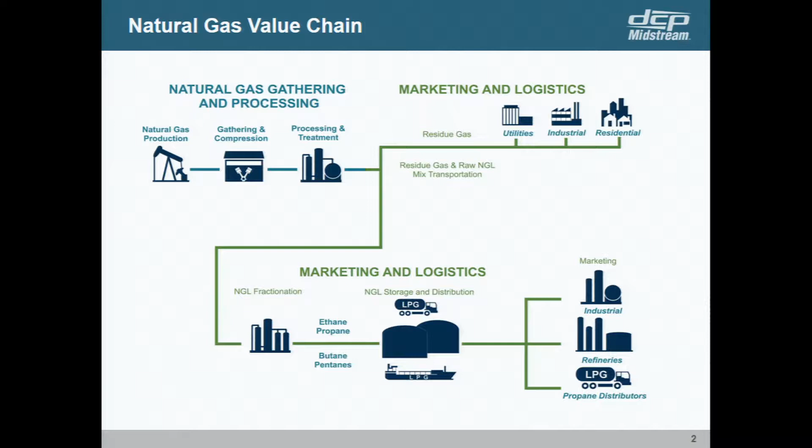As it gets downstream from the residue side, you can see where it goes to different utilities, industrials, or residential use. Or on the NGL side, it's coming down on the back side here, going to refineries and other products. Now, what I want to do is camp out on this one and re-hit this again. It was mentioned a little earlier today: what really is the value of natural gas? Because I don't think it's always really appreciated for what it is.

Most people, when you say natural gas, are going to say it's used to heat my home, or to cook or have a barbecue. And that's where it stops. Yet it does so much more than that. What you see here is that in the summertime, which we're all waiting for, by July and August we'll all be complaining about the heat and cranking our air conditioners, not only us but everybody else in the nation. And over 30% of the nation's electric power comes from natural gas.

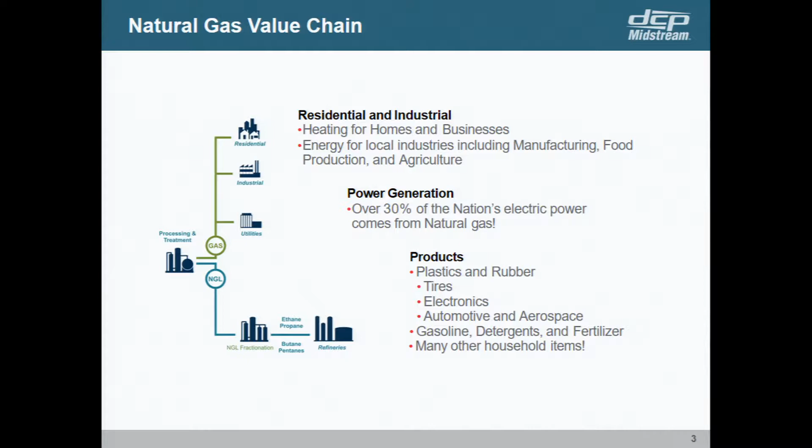As we get into the summer months, it actually increases even more than that. So there's a huge pull on that these days, and we see the market react to that. We used to have a lot of gas go into storage. You don't have a lot of gas going in there because of the heat. And when we have hotter summers, we don't always replace our storage as fast as we should.

The other thing I want to point out is natural gas is an ingredient used to make a lot of other things. It makes fertilizers, antifreeze, plastics, pharmaceuticals. People aren't aware it's in the medicines you may be taking right now as an ingredient. Electronics, rubber, and one of my favorites is fabrics. It's kind of amazing that we can take natural gas, process it and knock out the ethane, take it to the refiners, and scientists do all sorts of things, and it becomes polyethylene and then polyester.

And then you wear it. That always just blows my mind because people don't think about, if you're wearing anything poly, it's probably coming from the hydrocarbon molecule. And we just don't always realize that. So I'll say this here is that natural gas, as far as on the industrial side at the top, obviously it helps with a lot of other heating things around steel, glass, cement, bricks, other commodities.

I think the last thing to say on the commodity price is that I think we can all agree that natural gas is something that we use every day and we don't even realize it. And yet here we have a whole industry that most people don't even understand or recognize. And I go off that because as I'm out in public speaking venues or out in front of the public, there's just no information.

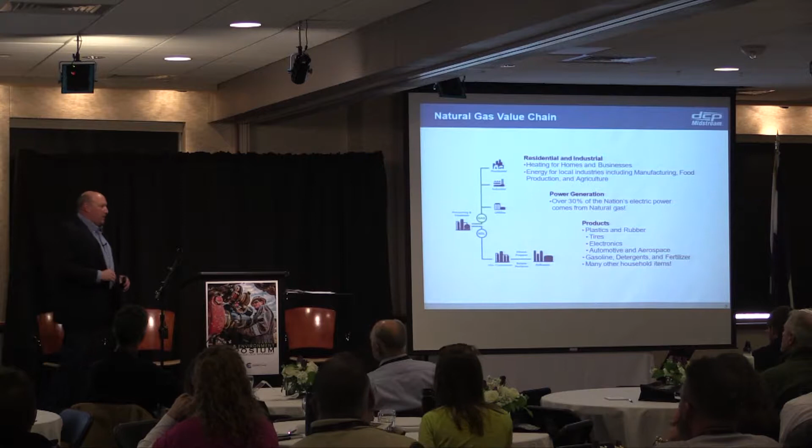They're like, what do you do? Again, they go back to like midstream must be something like what you see on TV, these big chemical refineries on the Gulf Coast or something, and it's nothing like that whatsoever.

I want to transition now and talk through a couple of things from a regulatory perspective, as far as who we are accountable to in the midstream. As we're out building facilities and talking to people, a lot of folks are like, who are you accountable to? Who regulates? What rules do you follow? And there's not a lot of knowledge on that.

And I'll just brag on my company, DCP Midstream. We were just awarded on Monday the first place prize for being the safest midstream company in North America. That's a tier 1 that has over 1 million work hours a year. So that was a big deal. Thank y'all.

I think sometimes the industry takes a bad rap on safety because they see one incident and then it gets blown out in the media a lot of times. But yet, you look at our industry, we're a very, very safe industry. Now that record is not zero where we want it to be and we're continuing to try, but we are a safe industry and we take that seriously.

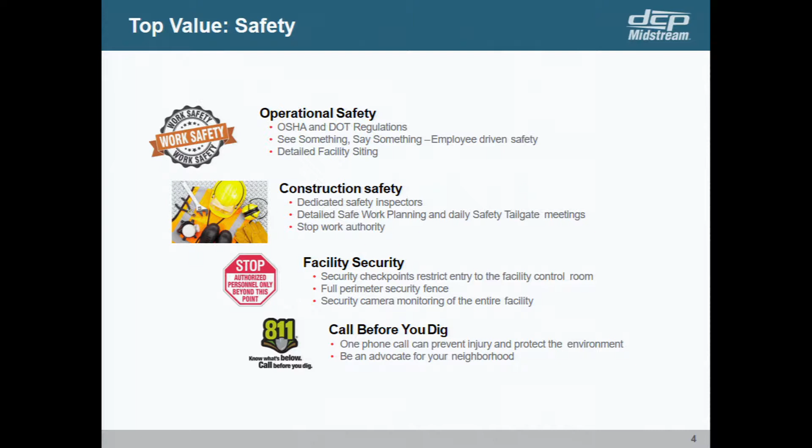I have been in the Weld County area now for 3 years. I've been out on site of at least 6 line strikes. And every time I go out there, they're like, I didn't know. I didn't know. And we're not talking about always hitting little bitty lines. Sometimes they're hitting big lines. And we've been fortunate it hasn't been more severe than what it was.

But 811 is a big thing where we try to get out there and educate the public, whether it's our neighbors, businesses, governments, anybody in the communities that we operate in. It is key to us that whether you're doing new road construction, road repairs, putting in utilities, new fiber optics, whatever it may be, neighbors putting in a new fence, adding on to homes, or farmers doing ditch work, new drainage work or irrigation work versus just the normal turning of the dirt.

They need to be calling 811 because when you think about Weld County alone, where we have over 4,000 miles just of DCP pipe, that's not even counting what other midstream companies have. That's a lot of pipe out there that you got to be sure you're looking out for as you're working. So we really make that a big deal because you don't want to strike something like that. This is obviously a new line lay, and we try to keep these on the perimeters, out of the public community and so forth.

But there's times where we come up next to roads and other things that you just got to be aware of. And sometimes contractors and the folks that do business are not always aware of that.

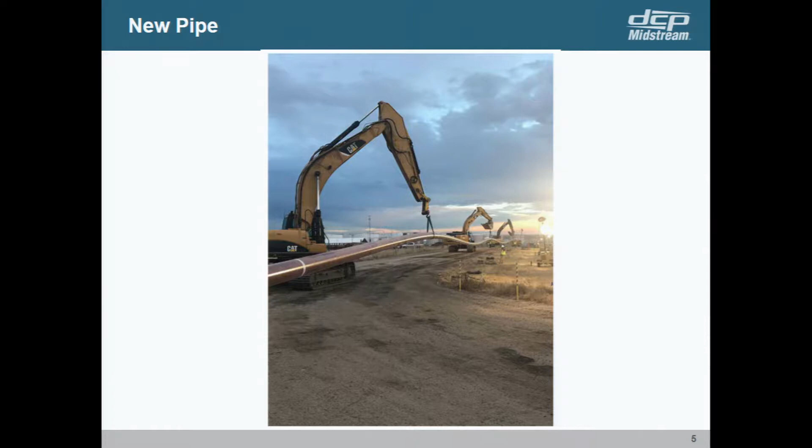Now I want to transition here and keep going: who else are we accountable to, from a rules and regulations perspective? And I'm going to stop right here. This is very important you hear this. This is not all the agencies that we report to. I got 3 slides. I just kept them because we all can associate with them here in the room.

But there are a lot of agencies that we are accountable to. Even on the 3 agencies I'm going to show here, this is not all their rules. I've just pulled some to get you a feel, an awareness, and a sampling of what's going on. Obviously, we start with the federal level EPA. You can see here that we have everything from air and water to what we do from a waste perspective as far as how we have to be in compliance.

I'm not going to go into these. I'm not going to bore you with that. First of all, my knowledge is not deep on that. And second of all, I got whole teams of people that know this much more than I do. But again, it's just for an awareness.

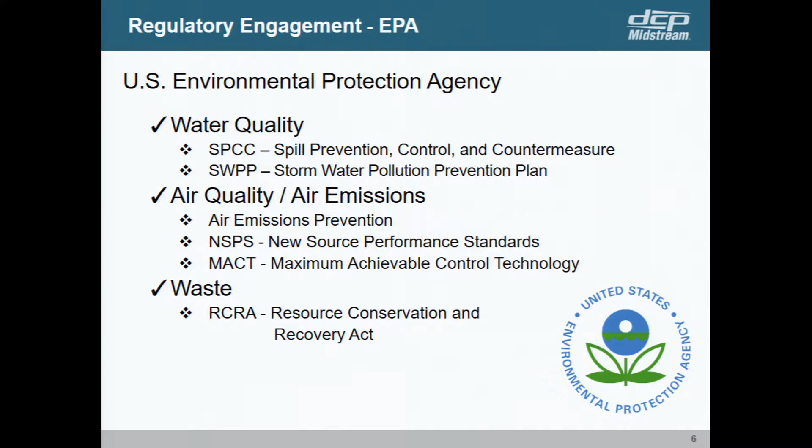You come closer to home, you got the CDPHE as far as what we have to do here. Again, looking at construction permits and operating permits. When we're building a new facility, we have to give a lot of information. We'll talk a little bit about that. We have to say, here's our plant design. Here's the equipment we're going to use. Here's the parameters for how we're going to operate that equipment. By the way, here's the emissions profile of that equipment. And they take all that into account as they're reviewing and looking to award us permits.

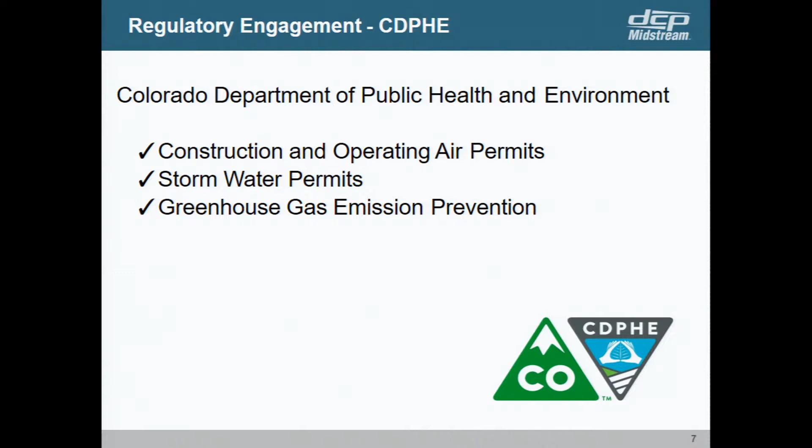Even above and beyond what we're doing from an environmental perspective, we have our own internal teams that help us to be sure that we're compliant. We do a lot of daily environmental monitoring and inspections. We have plant operators that are out taking instrument readings to be sure things are operating within the parameters as designed. We're taking automated information in as well, running it through calculations to be sure that we're in parameters. Go down to the bottom, we do a lot of self-internal audits.

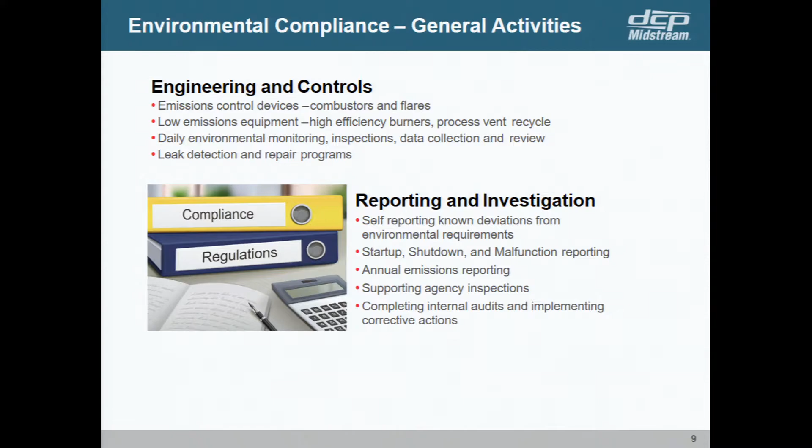When we do our self-audits and find things that are not correct or we're out of compliance, we actually have to self-report. And that's something that we have to do, and as a good operator, it's something that we do. And it can be painful sometimes, like, oops, we made a mistake, and yep, we got to turn ourselves in for that. In addition, the different agencies that hold our permits will come out and do planned and surprise unplanned visits to be sure that we are in compliance.

Going to go to this slide. I'm going to take a little bit of a turn here. I'm going to have to pick up the speed. So here we go. We're going to do 26 slides in 10 minutes.

What I want to do, we can do this, man, trust me. I got this. So here we go.

So I want to pause because this here, I want y'all to kind of think about this neighborhood engagement. As midstream, you think about the environment in Colorado, it has changed a lot in the last 3 years. It's not just where we can say we want to go build or drill or whatever, we get what we want. That is not the environment that we are in. And so we find ourselves out working with the community a lot more.

Before I get there though, there's many in this room, I saw the hands go up earlier, maybe 50% of this room right now is non-industry, which means you may be working with a midstream company that's coming and bringing you a submittal form for you to review. There's some first responders in this room. You may be reviewing an emergency response plan. You may be a commissioner who's reviewing a USR or a land use plan.

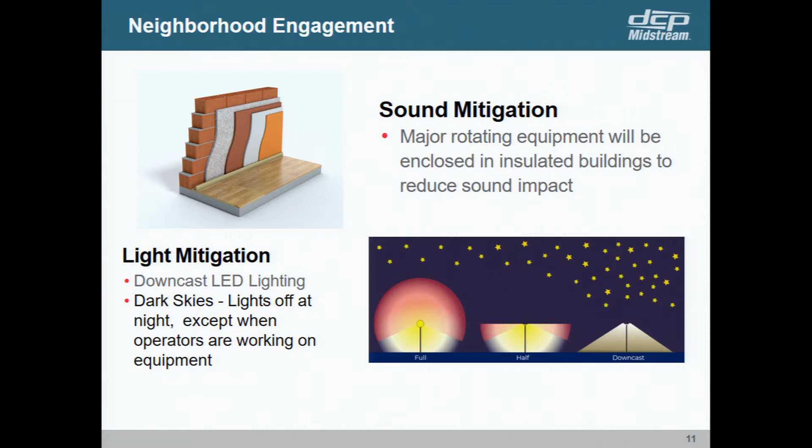If you were to drive by, you may not even know there's a plant there unless you see the light in the control room on. We will turn the lights on if we have to go out in the plant and do something, but outside that, we're operating dark skies.

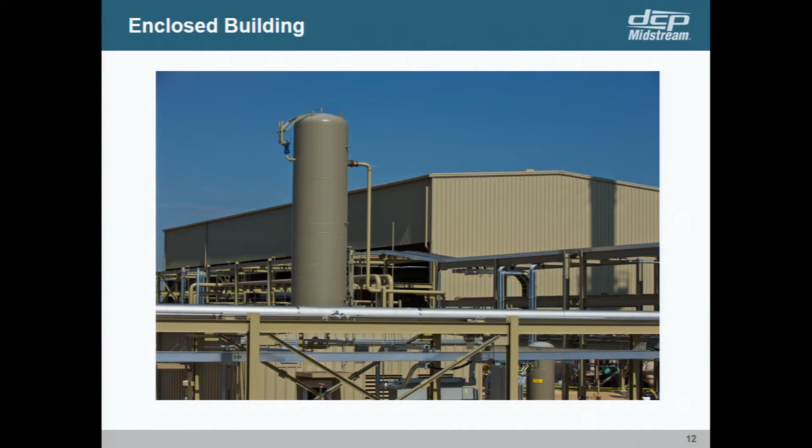Here's a sample, a picture of a building. You look on the outside, just like a normal tin building, but it's not. Inside, it's got a lot of special insulation that kind of dampens and captures the sound, keeps the sound down. That's where we have all of our engines and compressors, in that building right there.

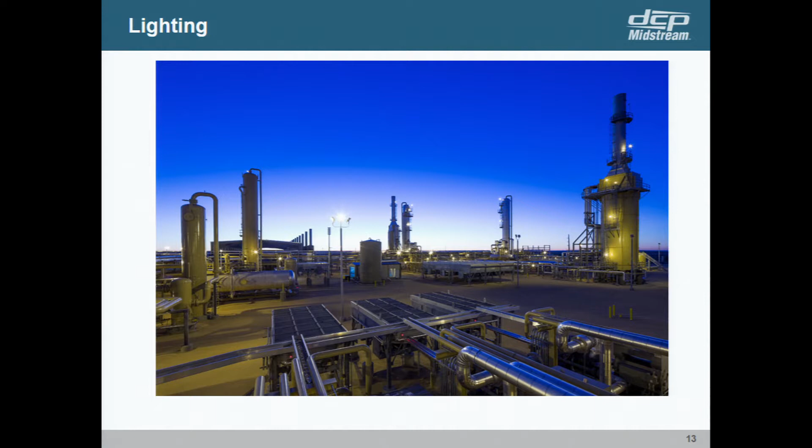So we're trying to address that. Here you can see where we have more of the broadcast lights, where you can see them hitting on the camera. Again, this is stuff that we're moving away from.

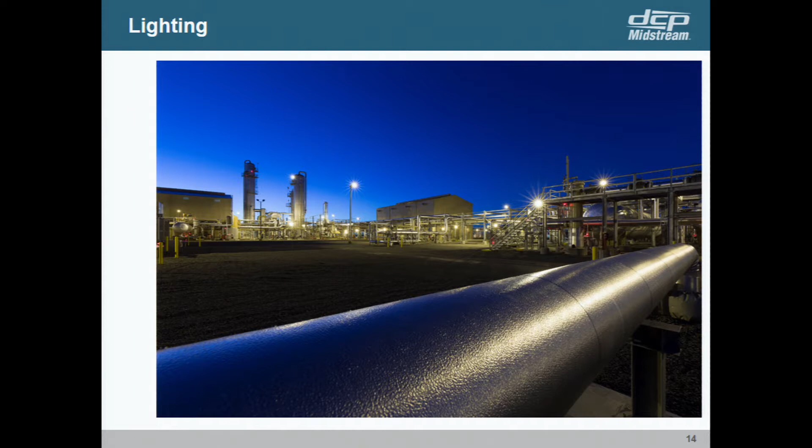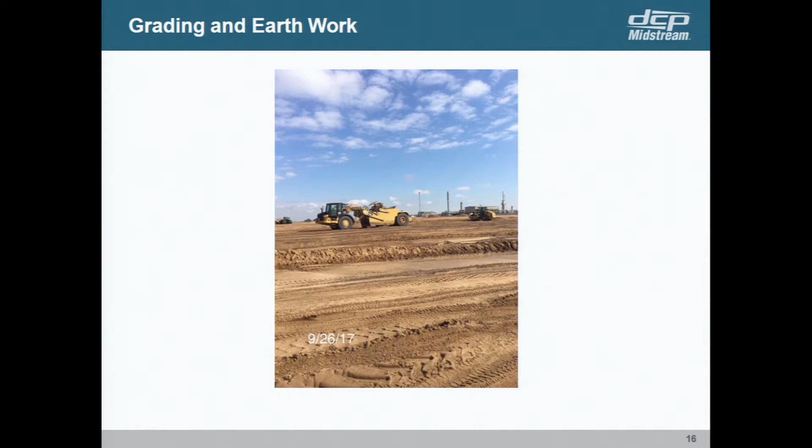So say we're in construction phase now. This is where we're going to blitz, so run with me here. We're going to go through this. You look at all the different phases that we have. Obviously, we're going to have grading. Grading can take anywhere between 4 to 8, 10 weeks, depending on how much grading we have to do, soil type, all that type of stuff.

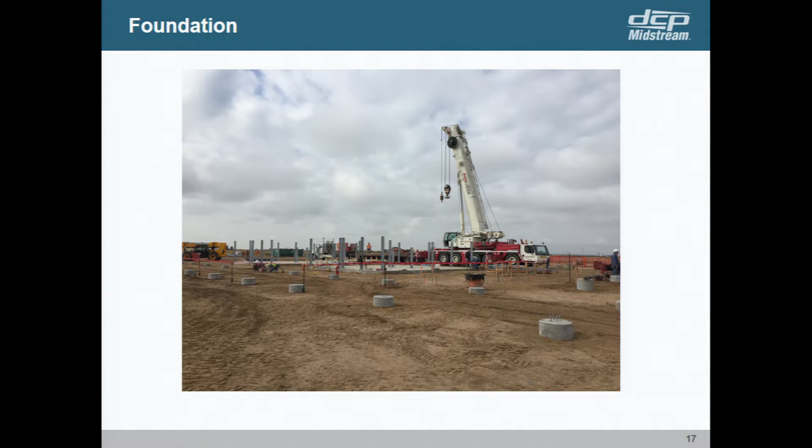Then you move into your foundations. Here you can see screw foundations, where we're going to be putting on pipe racks. You got slab foundations for big, heavy equipment that's going to be put in there. And so that's your next phase. Again, more foundation work from the screw piles. These actually are not cement, but more from a pipe.

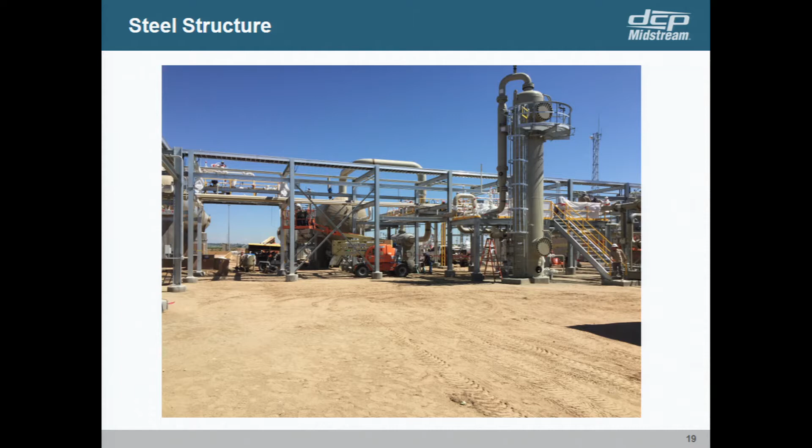Then you start erecting the pipe racks around there. You start laying your pipe in there. You start connecting the large vessels. You can see at the bottom end where the pipe racks are, and you got the screw piles that we added onto there. Continue to build on this. Again, more pipe rack shots. And then we get into this point here.

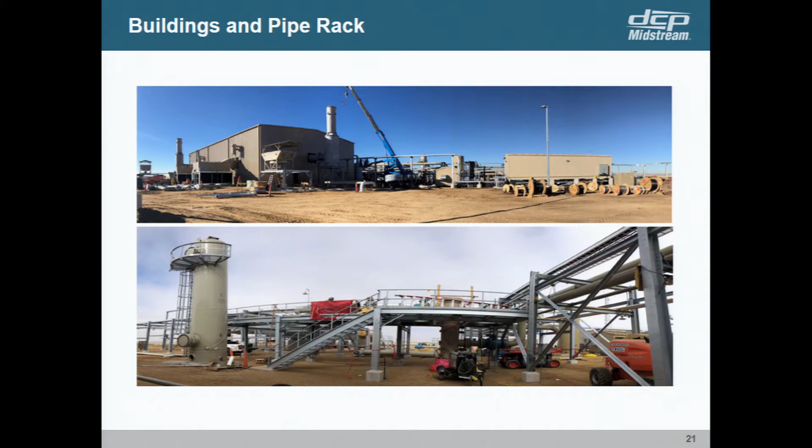Also, notice the angle of the lights. LEDs downcast, never up at night. So simply changing the angle of the lights is a big deal to our communities. And so we've listened, as have other midstream companies, as we're building new facilities.

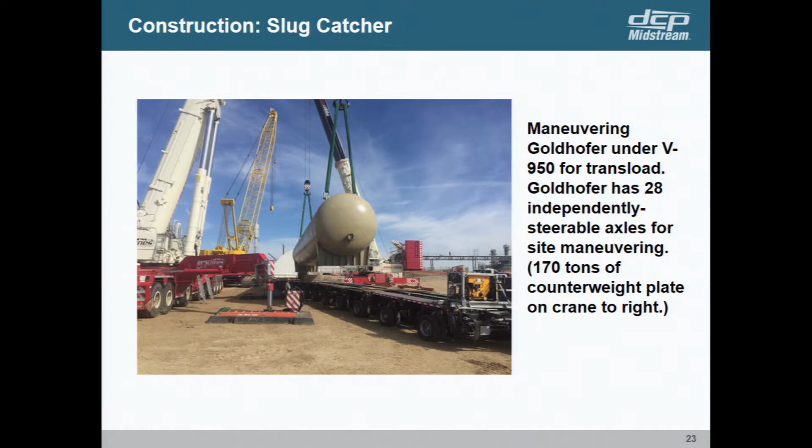Then we start bringing in the big slug catchers. Sometimes we have special equipment because these things are so large, getting road permits when we bring them in, trying to get these offloaded and get them in the right positions. Again, more heavy equipment here, cooling fans are being set on this.

And this here is an active construction site. This is what we refer to as our O'Connor 2. It's right outside of LaSalle, Colorado. We hope this plant will be moving. It's a new 200 million a day plant. And this is a shot just as of last week of where we are.

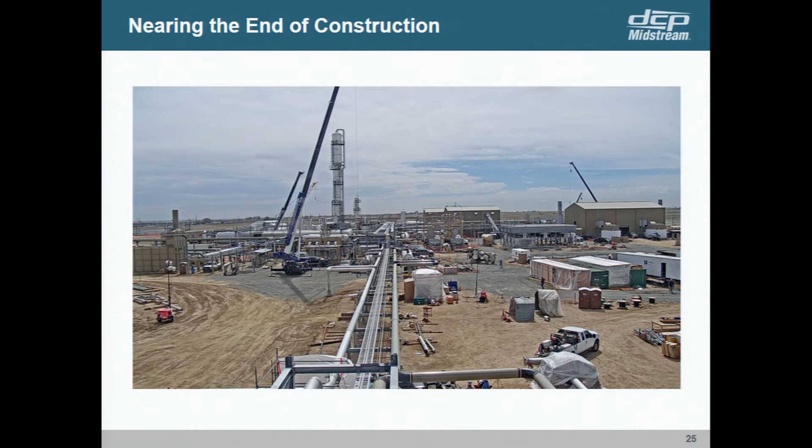You can see a lot of the pipe is in, the vessels are in. You can see the buildings in the background. A lot of electrical and instrumentation is what's going on right now to try to get this facility online in the June timeframe. From an aerial view, you see the plant; this is actually two plants right here. This is the old plant here, and then you got the new one kind of starting right here.

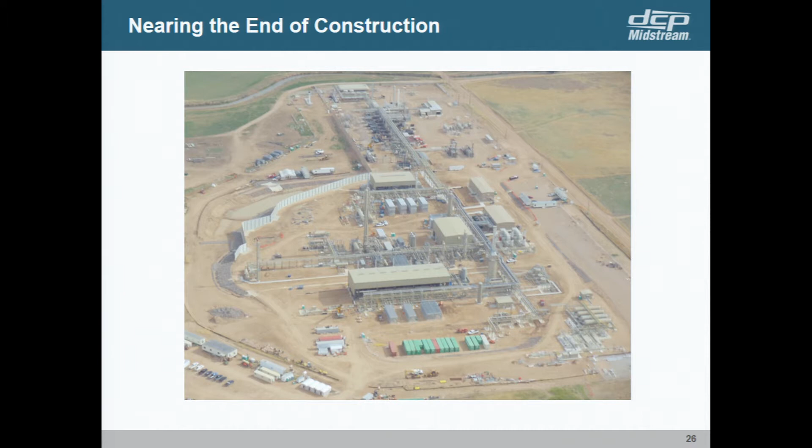And you kind of got to get a feel for the size of what a plant looks like. As you can see, it's a massive commitment when we build a facility from a midstream perspective. The other thing I want to notice here is this wall. It's kind of a big thing going around, as far as, hey, when you're building these facilities, can you soften the blow for what it looks like in our neighborhood?

And so what we've done is we've been able to actually build these walls. They serve about three purposes. One is, yeah, there's security. Two, they do some sound abatement for us as well. And three, these walls, when we build them, they're decorative. So they're not just a gray wall, it doesn't look like a prison wall or anything. It kind of looks a little bit like a castle stone wall that you can walk by and look at.

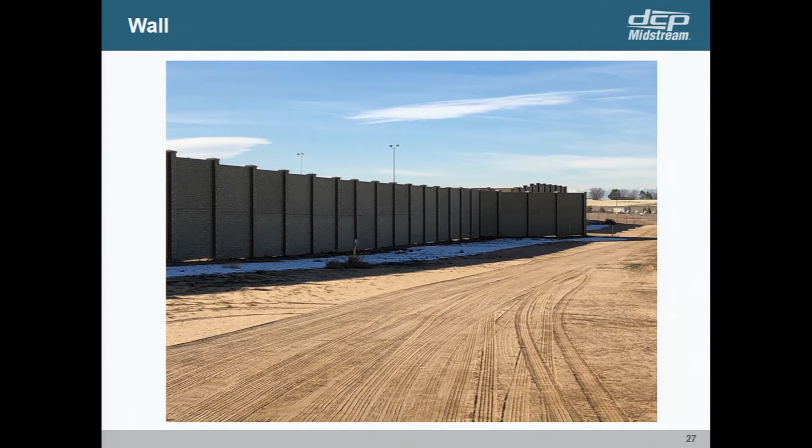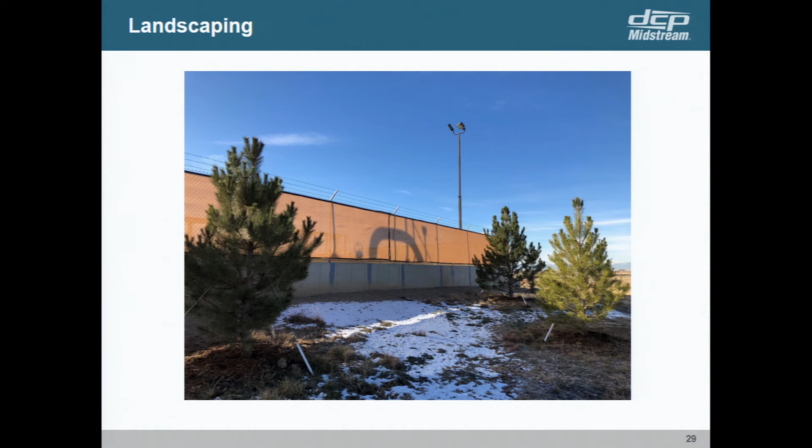So where the terrain and the natural topography allow, we can actually do these things to help, again, soften the blow and hide our facility so it's not as offensive up front. And then you get to see some additional landscaping there. You can tell this is the old facility because of the angle of the lights there as well. So, last two slides. See, I did it.

We see what's going on at the wellhead. We know what the pressures are on the pipeline. We know if our field compression is up or down, the discharge pressure, suction pressures, we know all of that. It allows us to be sure we're getting the gas to the plant. Is the plant running most effectively? And not only that, we know what's going on downstream. Are the takeaway pipelines running well? If there's any disruption anywhere in the value stream, we can adjust, providing a very consistent service to our producers so they can always move as much gas as they can and keep the oil flowing.